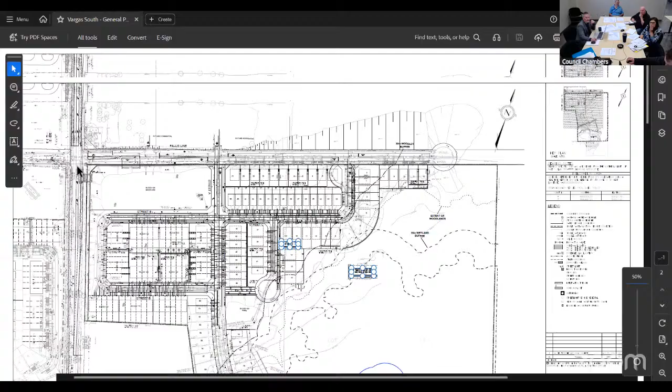Starting right at Fallis Line, there will be an extension of Fallis Line going to the east. That is a separate plan, so it will be brought back to the committee at a later date for review.

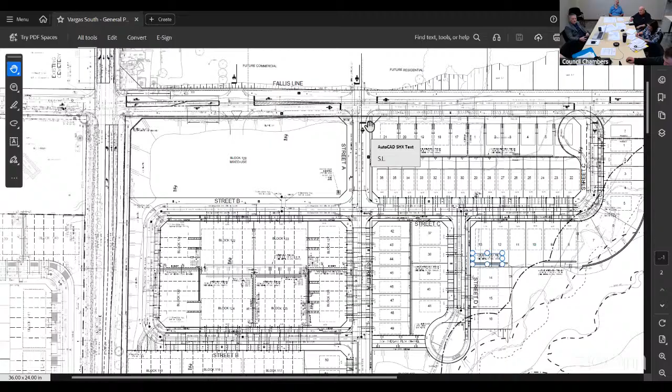Regarding Fallis Line, there will be sidewalk on either side of the road. That brings us to Street A, which presently has sidewalk on the east side, a 1.5 meter sidewalk. Following my cursor, it goes straight south along Street A and goes directly to the park block, which on this plan is block 132. Continuing south, it maintains on the east side of the road.

Continuing down, I will have to switch plans here. Drew, is it okay if I ask a question now before we go, just so I don't forget? Yes, for sure. Okay, so forgive me if I'm jumping ahead here.

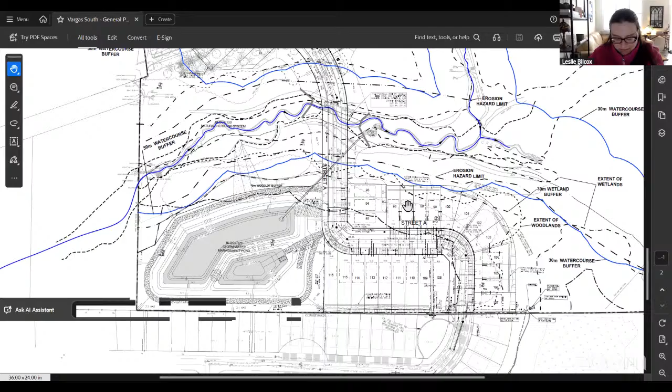I was just looking at the intersection where Street B meets Street A. I see the sidewalk is on the north side of Street B, going over to the east side of Street A because there's no sidewalk on the west side. So when we cross at Street B over to the east side of Street A, I can't tell if it's going to be crossing over into a driveway or if there's going to be a small sidewalk connector to allow safe passage across the street.

For sure, so presently on this drawing, you are correct, it is crossing into a driveway. As I mentioned to start, this is just a draft plan for the engineering document. I have noted that in my review right now, so it will be a request going to the consulting engineer to make an adjustment if possible to create an actual sidewalk approach and not cross onto the driveway. That will be a comment.

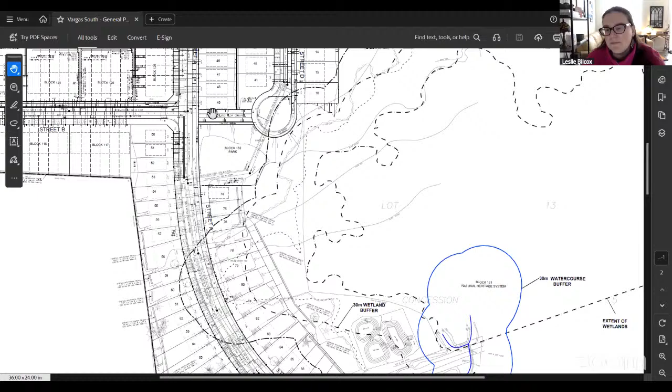Yeah, I mean, just walking around my subdivision, there are several places where there's just a little sidewalk to provide a safe crossing. For example, on my street, people cross into my driveway because there's no sidewalk crossing available. During the summer months that's adequate and safe, but in the winter that poses a bit of a concern because there's nowhere for people who need assistive devices to cross safely. The mailbox is also located there, and I don't know at what stage you become aware of where those are going to be located, but it's just something I've noticed that can pose a potentially unsafe situation for pedestrians.

Definitely, that's a very good comment. In previous discussions we talked about some of the issues that were missed in the Tower Hill South development, so we are looking to correct those the best we can moving forward. Great, thank you.

Just as I was mentioning, I'm going to scroll to my next drawing. It shows the sidewalk continuing around the bend, now on the north side of Street A, then continuing to Colebrook and connecting into the sidewalk on the southeast side of Colebrook Drive, continuing right into Colebrook throughout that subdivision.

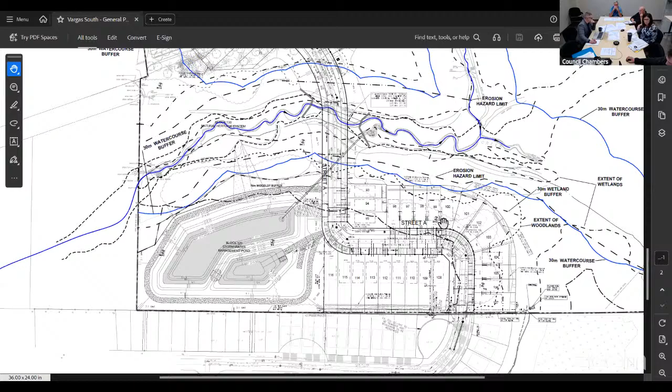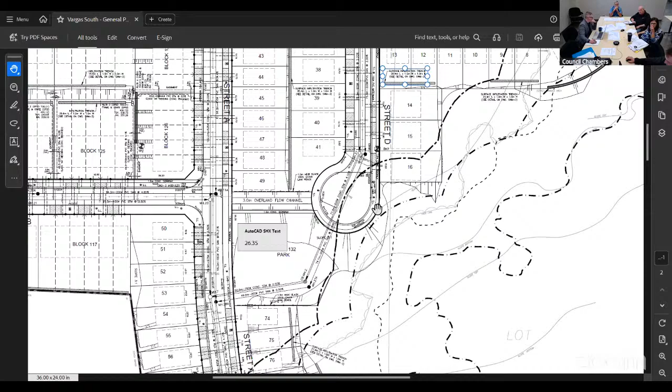Moving back up the drawing, I will start at the park block and continue up. As I mentioned, the sidewalk continues right to the park block. There is a sidewalk connecting Street A to the cul-de-sac of Street D, continuing all the way around the cul-de-sac and on the east side of Street D. That comes back up to Street B, connects to Street B, continues, connects to Street C, and continues back to Fallis Line, where there will be a continuation of the sidewalk going to the east.

So I'm back on Street D coming up. As I just mentioned, you could go to the east and go out to Fallis Line, or you could go west and continue on Street C. There are curb depressions at the intersections to allow you to cross there.

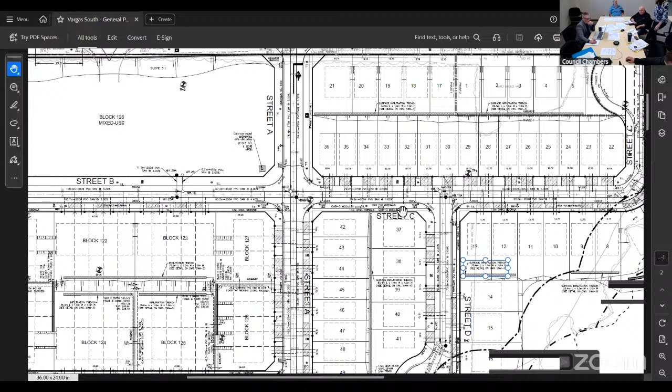The sidewalk, as I mentioned, is on the south side. The Street C continues and you can cross Street A, which would be going to Street B, and it is on the south side of Street B. It loops all the way around this block and comes back to Street A. That's the area that Leslie was just mentioning about the crossing across Street A there.

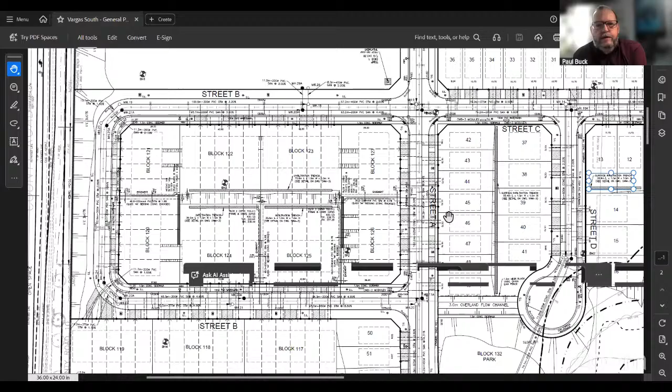So where were we again? No, just kidding. Okay, pick back up, question please.

Yep, go ahead Jerry. What is a flow channel across from Street B? What's that? Is that paved that you can drive on? That chunk that goes from the cul-de-sac to the west, right there where your cursor is, that piece there, what's that? What is a flow channel?

It's an overflow area for stormwater. So you can't walk through there. It would be a grass area, I'm assuming. A ditch. Yes, it would be a ditch.

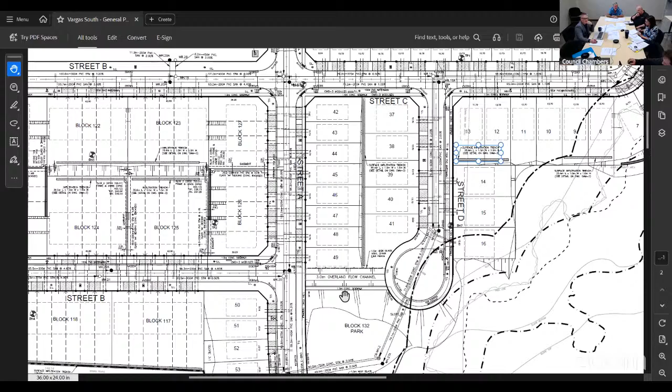We have allowed for the 1.5 meter sidewalk. Yeah, on the south side, runs right through. I live there. Through the middle, yeah, sorry, south side. Right here where my cursor is, there's a sidewalk right on that, going to sidewalk on Street A and to the cul-de-sac.

So that ditch, when it gets to either edge on the east and the west side, does it flow into piping? That's an overflow channel, that's just a grass area that flows out from street to street for major flows. So if we have a 100-year storm, it comes down the cul-de-sac, flows through the street and down.

But I'm trying to figure out the grade to the rest of the land around it. If that channel needs to be deeper. Where's the water go at either end? Well, it's more just a retention for overflow, it's not gonna be a pond, it should be dry. It's for if we do get a large storm, there's a catchment area. Yes, there's no place for it to flow out on either end.

No, because that's all I'm trying to figure out. Yeah, no, it's mainly for the rear yard, for overflow area to come down, yeah.

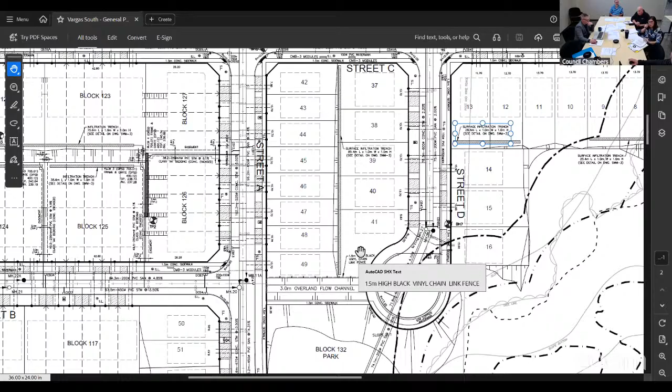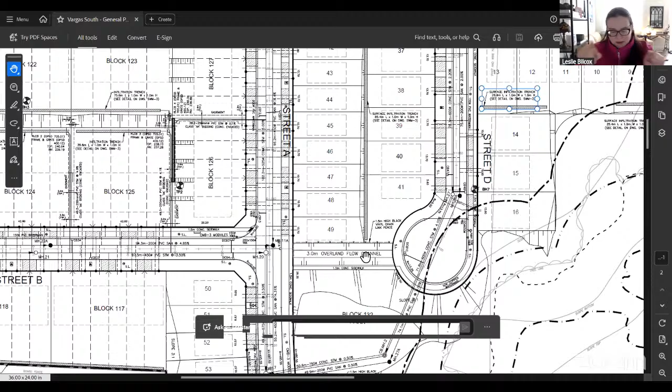So I believe I've gone over all the sidewalk. Did you want to mention, sorry, about the other side of the street? Good question. Is it okay if I ask another question, Drew, before you move on from the park block? For sure. So I'm just looking, I see how the park block is essentially completely surrounded by sidewalk on the west, north, and a little bit of the east where the cul-de-sac is.

Do you know where the walkways going into that block will be positioned? I was just curious about the grading there because I couldn't see, I see that there's a slope, but I couldn't read what the slope was. Like in the park in the subdivision that I'm in, there's a walkway that connects to the sidewalk so people can walk through the park on a paved surface.

And I just wasn't sure if you knew where that was going to be placed, and if it would be placed kind of away from the overflow channel.

So at this time, we don't know the design of the park. We will be going through that process at a later date, once we're ready to go through that stage. So like I mentioned before, once that site plan is in draft form, then we would bring that to the committee. But at this time, we don't have a design for the park.

Okay, and then just one more question on the sidewalks. Do you know what type of material will be used for the surface indicators at the sidewalk crossings in this development? I know in the one that I'm in now, I think it's the plastic surface indicator. Some of them are a little bit damaged, so I wasn't sure, from my knowledge, what the standard was and what in your experience you have found works best to achieve signaling that you've crossed a street if you're visually impaired.

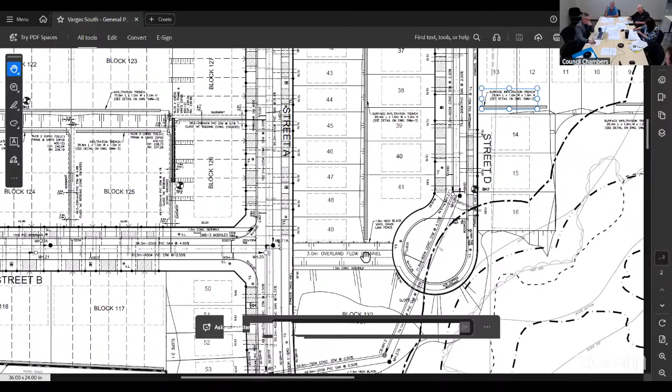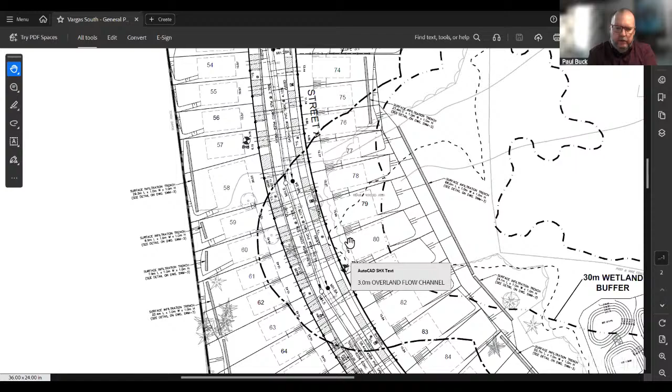Do you have a question? I have two questions if I can. One, understanding of course that this is a preliminary drawing and not finalized, but further down Street A to the west side, there is a walkway that seems to go to nowhere. I was just curious what that is, what the future plans might be - is there a concrete sidewalk, a multi-use path, or is it just a hold for now?

It is just a hold for now. We did request a section of land there for a walkway for future connections. Off to the left of the screen here, that is Buckland Drive. So there are a couple hurdles to get to Buckland there, but the idea was that down the road, we could have a connection from the subdivision to Buckland, and that would also connect to the trails on the west side of County Road 10. So at this time, we don't have a plan in place for it, but we are retaining that land for future considerations for that connection.

Fair enough. Okay, and my second question is, it's probably the standard now for concrete sidewalks, but will the top coat finish be the same as the sidewalk that runs from Buckland Drive up to the new community center?

Or will it be the old style that runs from the school to downtown? The old style is incredibly rough if you're in a mobility device and don't have good suspension, but the other sidewalk is much nicer to ride on.

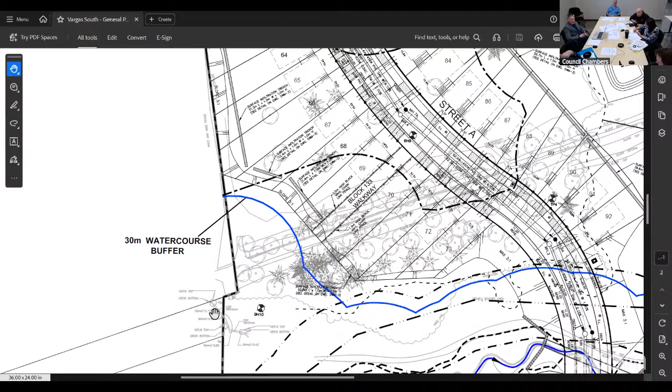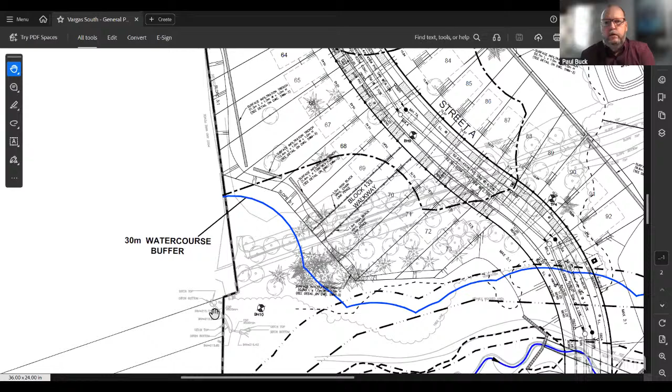When they put the separation in between the pads and the way they finish it off, it's like going over railroad ties in the old style. So the new style is much better.

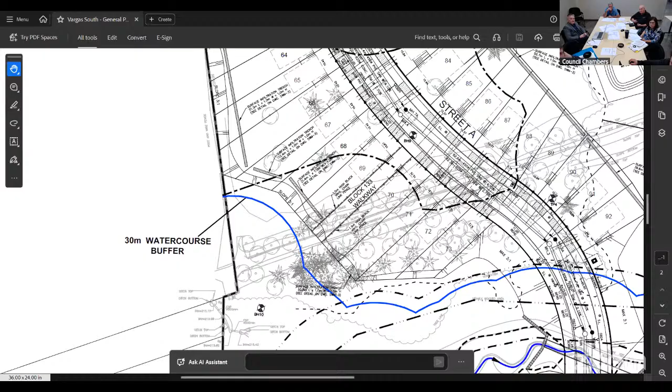So on the southwest corner of B Street where it gets close to County Road 10—yeah, while we're talking about sidewalks.

Human nature is gonna be to take the shortest path. There's gonna be people living on one side of County Road 10 and the park's gonna be on the opposite side at some point in the future. I'm thinking human nature is gonna be that we want to cross on that County Road 10 hill. I don't know what's at the bottom end of that street—doesn't look like there's lots going back out onto County Road 10. Is there gonna be pathways for people to travel from the east side to the west side of the road on County Road 10, or is that gonna be curtailed as much as possible? Human nature is they're gonna want to cross, not walk all the way up to the intersection and then all the way back down to go east to the park.

It's a fair comment, and we've kind of seen that in Tower Hill South too. We do have a crossing there, but a lot of people tend to climb the nature hill instead.

So we have been looking at that. As you know, we are doing the County Road 10 EA study for the design, so depending on where that design goes, there is potential to have a connection. Part of the issue along County Road 10 is there's a fairly large slope, like a 3-to-1 slope going from County Road 10 onto the subdivision. So it has been brought up and we are looking into it. Until we get further into the design of County Road 10, it's hard to say exactly what we will and won't be able to do, but the idea would be to have a connection through there.

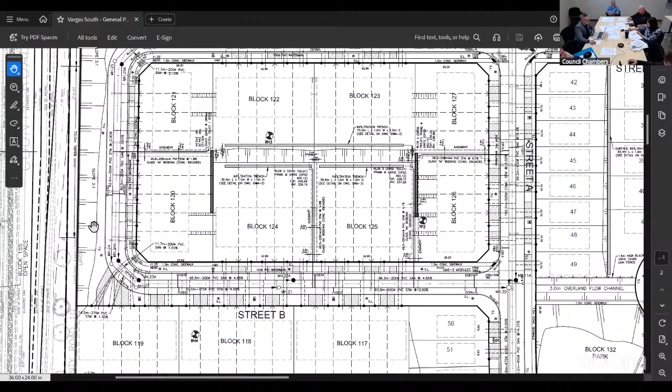The other comment I'd make is that we do have signals agreed to between the county and the township that follow at Fallis Line. Yes, but human nature is not gonna walk all the way up that hill to come down. Fair comment, I understand. So we're looking at that interconnect, but we do have signals planned for the town.

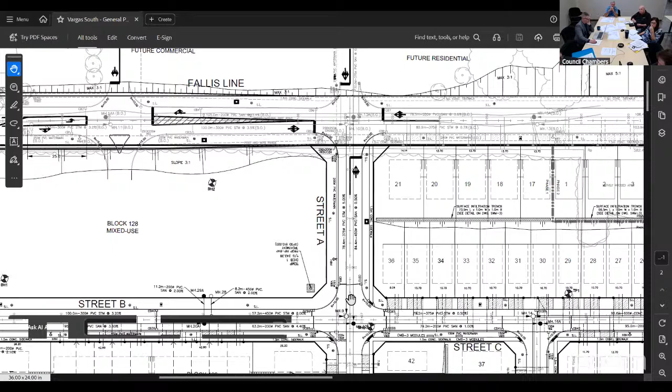Just one comment that Wayne was briefly mentioning earlier: the township has requested on Street A, which is the main street that goes all the way through, to have sidewalk on both sides of the road. This is one of the first drafts we sent, and they've only included it on the east side, like I've mentioned. So we are requesting that it be on both sides so there is an easier connection, and not necessarily having to cross as many roads.

On that note, is there any difference on either side of the road for what the township owns for road allowance, so that in the future, if things change and the volume's enough, it could be added? There's no difference in the lot depth, no—the boulevard width is the same on both sides of the road.

So ideally, if they were to agree with that request, it would mirror exactly what is shown on the plan here, on both the east and west side of Street A. Is that the same for all the streets? No, just Street A, the main street that goes from Fallis through. But the township boulevard would be the same on all the streets—yes, for all the streets, they are symmetrical.

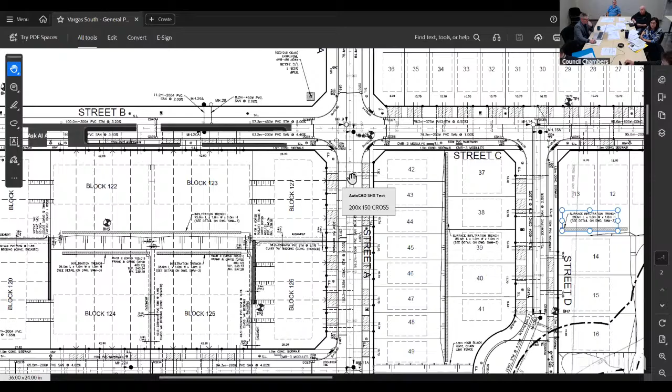Any other questions? No? Not for me, no. Thank you for the walkthrough. Yes, thank you very much.

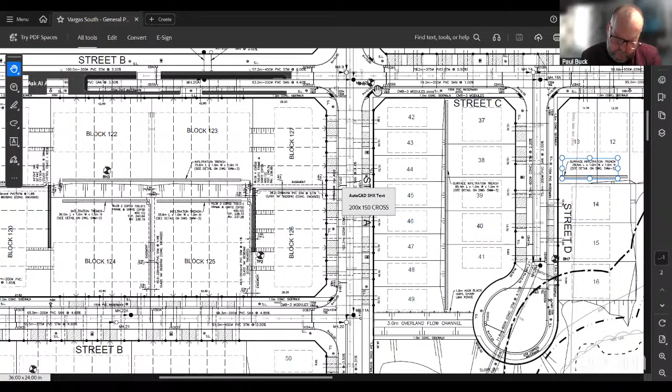Okay, so we'll wrap that up. We'll have to call for a mover and a seconder, that the Accessibility Advisory Committee requests that regard be given to accessible design standards for public spaces identified in AODA Ontario Regulation 191/11 for this plan.

Can we get the mover and seconder, Councilor Burns and Leslie? And Cindy, can we get you to do the recorded vote, please? Leslie, Yes. Chair Buck, Yes. Councilor Byrne, Yes. That's carried. Terrific. Again, thank you very much.

I really appreciate that, and we look forward to seeing some of the future items for us to get a look at as well. Great, thank you.

We're just going to take a minute. I think staff are going to go, they have other places they need to go. So Mark and I will continue the meeting with the rest of the committee. Absolutely, thanks very much, nice to meet you. Thank you, it was nice meeting you as well. Good luck with the rest of the meeting. Thank you. Great, thank you so much.

We're wondering, through you Chair Buck, about the hesitation, what was happening on the other end with the choppiness. I don't know if it was maybe the AutoCAD drawing that was being displayed. Now that Drew's no longer sharing, maybe that will go away, but we might have to do some testing as we go forward if we're going to be using AutoCAD drawings. So that's what was happening with the sound back and forth. We apologize for that.